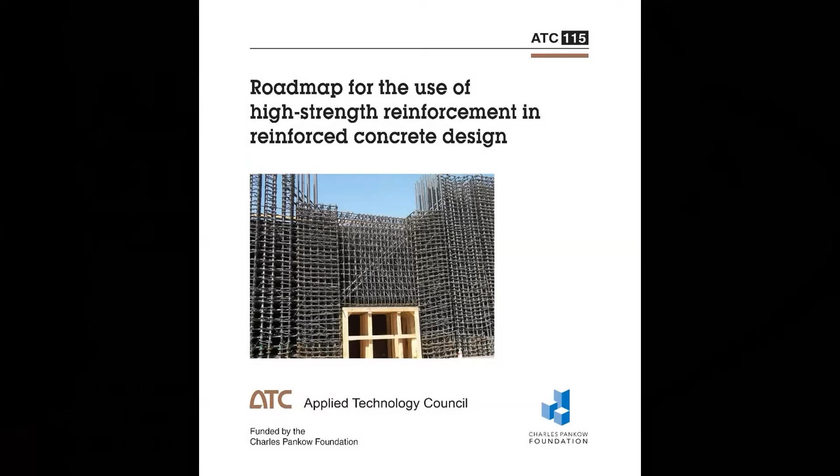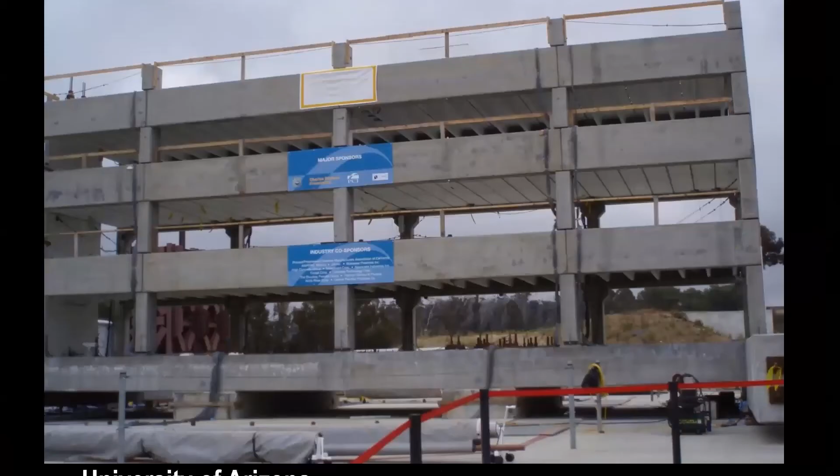Over the last 10 years or so, there's been a pretty substantial increase in the amount of new information and new research done on a wide variety of topics, whether it be high strength reinforcing steel, the performance of columns, or the performance of beams. Precast structures have been investigated substantially for seismic performance. Coupling beams and different ways to detail, design, and construct them have been tested, and substantial bodies of new research have been developed.

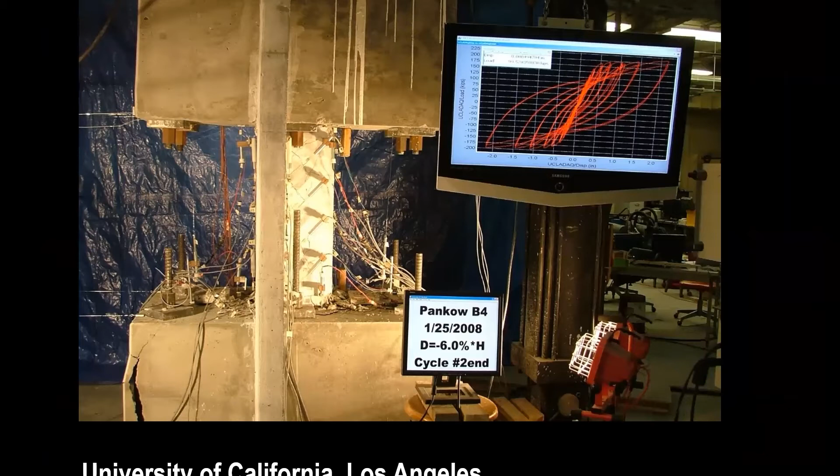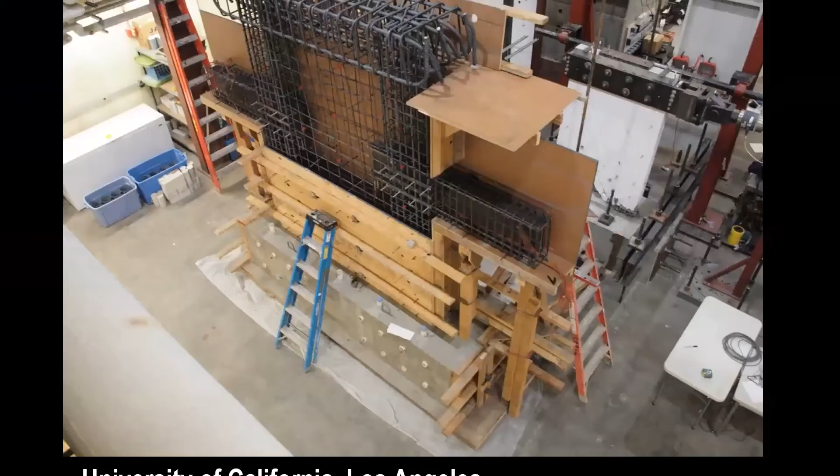Very shallow precast floor systems have been developed. Also, precast connectivity for cladding of high-rise buildings has been studied for its seismic performance. Shear walls with composite construction, whether it be embedded steel shapes in a wall panel or steel sandwich panel construction, all of these things have been researched.

And beyond research, guidelines like BIM execution guidelines to better the industry's practices of BIM, the TBI guidelines mentioned earlier, and more recently, studies of embedded or embodied carbon in the construction industry and in buildings through life cycle assessments - all of these topics have been advanced in just the last few years. And they all came from a point of view of really being inspired by practitioners and contractors, people out in the world facing challenges each and every day.

And it resulted in advancement in our industry through partnerships with various research industries. Now, all of that was done in a very practical way. There wasn't any silver bullet that inspired the thinking, and it didn't come from anybody's mobile phone. There was no app developed to come up with these ideas.

So in the ASCE 7 code, this is actually ASCE 7-10, there's a table that presents the response modification factors, or R factors, for seismic design. You can see right here for a special reinforced concrete shear wall, R equals 6, and the height limit is 160 feet, or about 50 meters.

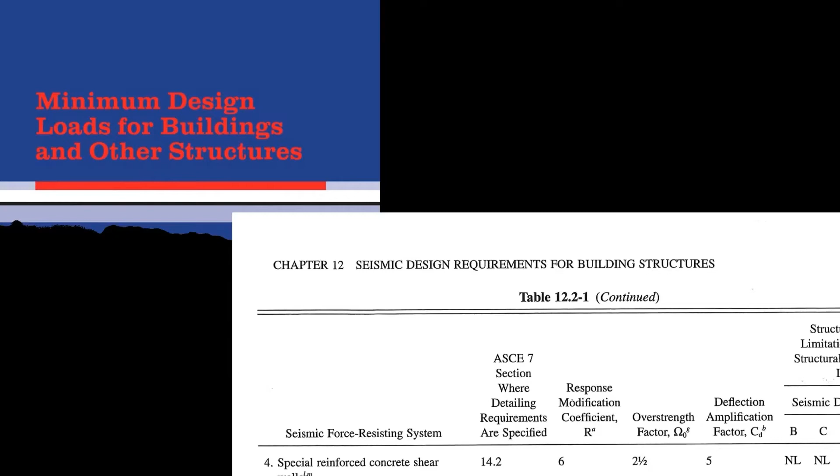When I first discovered this provision years ago, maybe 25 or 30 years ago, when I first started practicing, it always struck me as odd. Why 160 feet? It's a very curious number. Why not 150 or why not 200? Why is it 160? It seems very precise. I did a lot of research into why shear walls were limited to 160 feet, fueled by this question: why is it that in the first place?

What I discovered was a very curious situation. It dates back to 1920s Los Angeles. There was great concern by the city council about what they called the Manhattanization of Los Angeles. Specifically, they were worried about shadows being cast on the streets of otherwise sunny Los Angeles, and they wanted to limit the height of buildings so these shadows weren't so prevalent. So they passed a law in the 1920s limiting the height of buildings to 150 feet. Keep that in mind—that was the law to prevent shadows from being too great.

A couple of decades went by, and seismic engineering started being developed in the 1940s and 1950s. One of the things discovered or worked on by seismic engineers at the time was the importance of tall buildings. This was the type of building being built at that time: steel frame construction for taller buildings with brick infill panels or shear walls.

They viewed this type of construction as appropriate for tall buildings, but wanted to limit it to a certain height, and they didn't quite know what height to choose. So they took as reference the 150 feet that was the law in Los Angeles from the shadow study. It turns out that about the same time the structural engineers adopted the 150 feet height limit, the city of Los Angeles removed that height limit for zoning purposes.

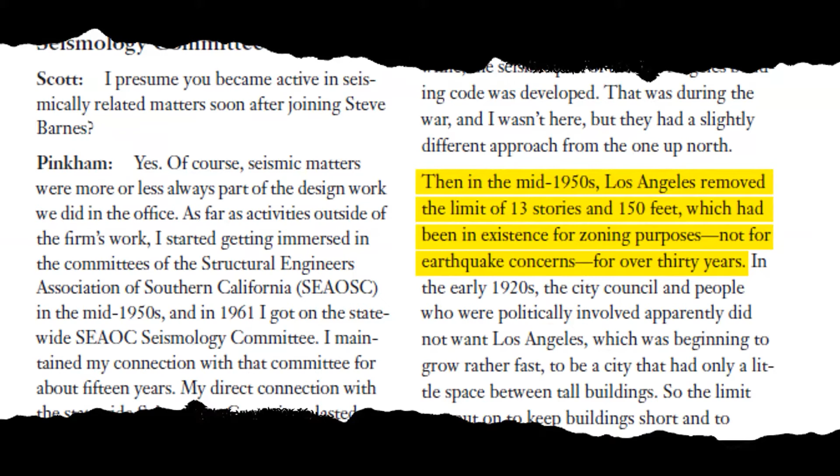I dug further into this to understand why did they change. And it turns out that this, in fact, was a typographical error. It wasn't intentional, when the code went to the printer, they made a mistake. It was intended to be 150 feet, but instead they printed 160 feet.

Well, that's very strange. So the printer was mortified of their mistake and asked the code committee, what should we do? We've already printed the codes up and distributed the code books. What should we do? And the committee's response was, don't worry, don't do anything. We don't really know the answer that well anyways.

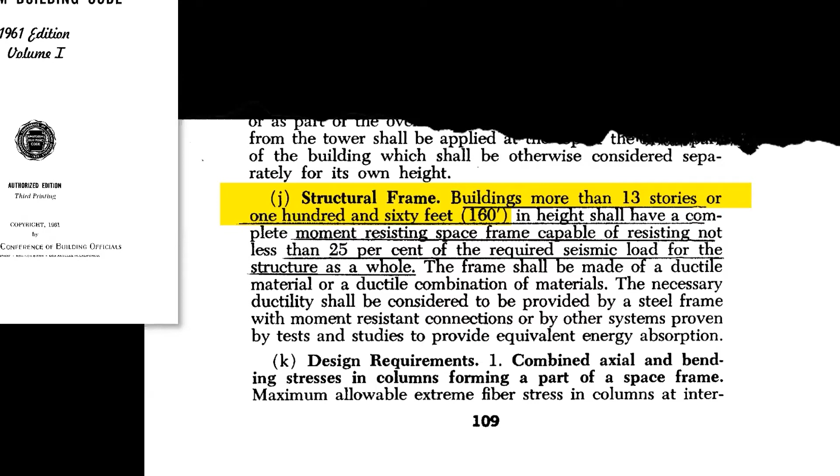Once you understand and appreciate that story, it gives you some basis to ask, well, why should I even follow that then? Because it makes no sense. And the truth is, our building codes are littered with this kind of folklore in terms of code provisions. A lot of it is not based on science. A lot of it is based on committee negotiation, committee compromise. So the point of this is to always ask why things are in the building code.

So today, when we're building these very ambitious buildings, like here in San Francisco, following prescriptive code language that really has its roots from the 1920s and then on to the 1950s doesn't really make so much sense anymore. So asking why is very, very appropriate.

That's why we created the TBI guidelines, to give practicing engineers more capability to use their skills in math and in science and in physics to really do proper engineering rather than following the prescriptive language of the code, because some of the things in the code are just nonsensical.

Turns out that we're pretty good as engineers at putting up hurdles. And these hurdles are things that we face, and then we feel like we need to jump over each hurdle, and then the next hurdle, and then the next hurdle. When in fact the objective is to win the race. So why not just run in the lane that has no hurdles?

This is the idea of performance-based design. Rather than following all of the hurdles of the prescriptive rules of the building code, why not go back to first principles, engineering, physics, science, and math, and run in a lane to the goal line, to the finish line, where there's no hurdles in our way.

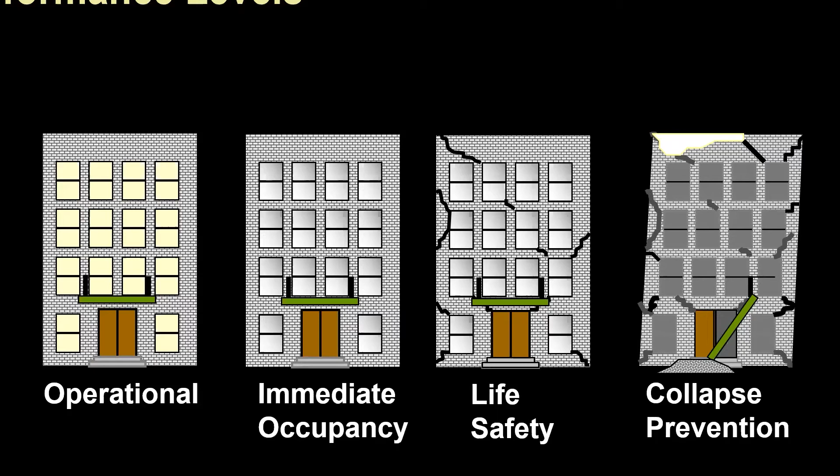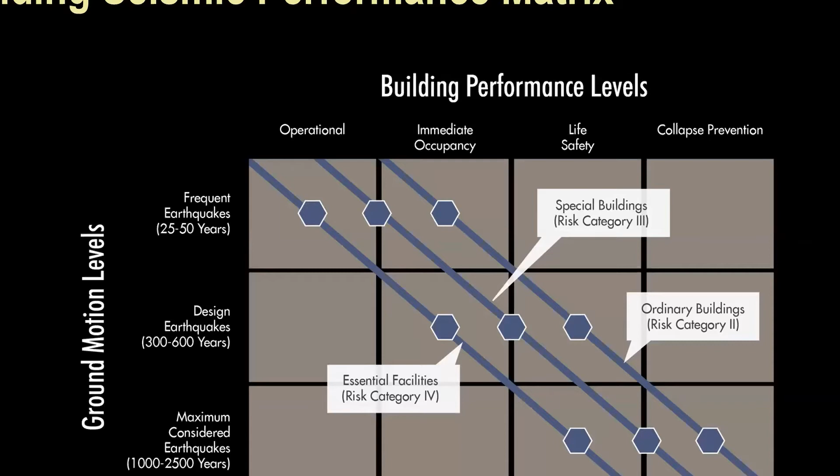Those of you familiar with seismic engineering know that we've worked toward targeting different performance levels, from operational all the way through to collapse prevention. And we've created a framework for performance levels as it relates to demand levels, to tune our designs to achieve certain objectives under various demand levels. For seismic engineering, this has become the norm, the standard, and it's quite robust. It really forms the basis of what we do today in the seismic design of tall buildings.

But for wind design today, we're still in the dark ages. We're not working in a performance-based environment at all. We're still working in a prescriptive code environment where we define one design wind speed, and then we design our buildings to remain elastic under that wind speed.

For places like Miami in this photograph where hurricanes are prevalent, or in other places like where my good friend Boise lives in Manila, where typhoons are present all the time, our buildings are very, very, very conservatively designed because they're designed to remain elastic under this peak wind demand, this peak wind velocity. Why are we doing that?

Why don't we instead adopt a philosophy similar to the seismic design philosophy, where we allow different performance levels and some modest amount of nonlinear behavior in our buildings, and in doing so, make them much more efficient and much more cost-effective for our clients?

Anyway, this is a question that we've asked recently. We've asked why. And we're working very diligently with many collaborators around the world to advance the idea of performance-based wind design, so you'll be seeing more about that in the coming years. But it all started with this question of why are we still doing it essentially the same way that's been done for the last 70 years?

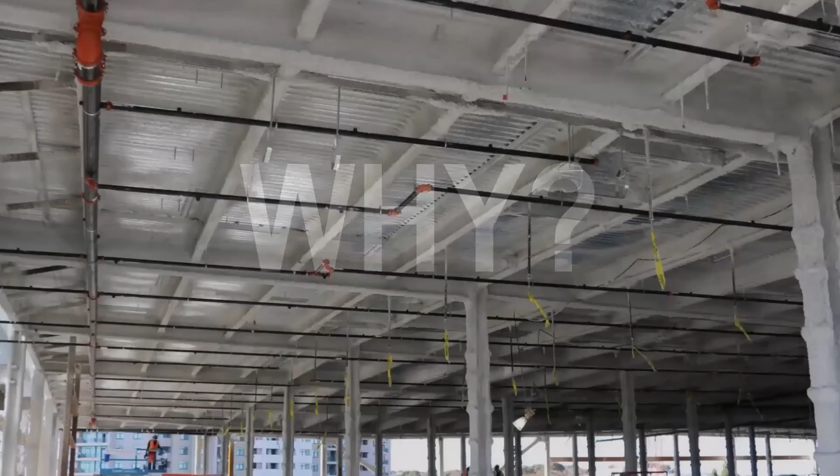Another area where we're asking the question why is in steel construction as it relates to fire protection. Here you see a standard construction type where the steel beams and steel columns all have a spray applied fire protection, and in addition, you see the sprinkler system. And once again, the question is, why is it that way?

And the truthful answer is born mostly in folklore. There's not a lot of science behind why are we constructing and fire protecting steel buildings that way. So instead today we're advancing the idea of performance-based structural fire engineering to, again, use science and math and physics to understand temperature as just another load case for steel construction.

That was the question. And the question was, why not locate the post-tensioning anchor, here you see here, outside of the core wall rather than inside of the core wall? By moving it outside of the core wall, it would offer great efficiencies in construction and reduce a lot of complexity. And so we asked, well, why not?

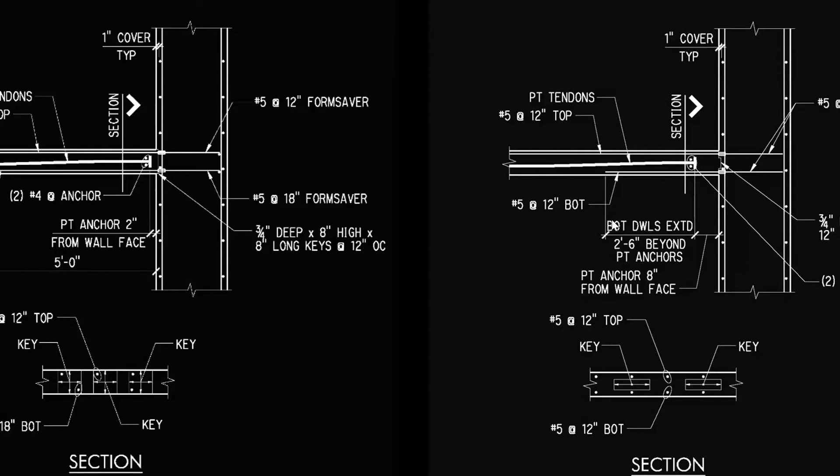And why not look at it a couple of different ways? On the left-hand side, you can see the anchors close to the wall. On the right-hand side, maybe moving the anchor a bit further away from the wall. Why can't these details not work? So we asked the question, why not?

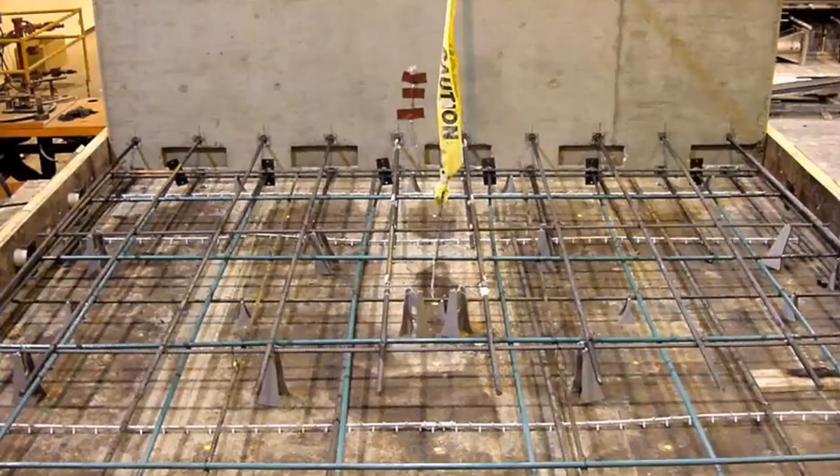And we went into the lab, and we actually built a full-scale test module of a core wall and a slab and a column. And we reinforced it. And then we put it through the rigors of testing to prove out that this detailing approach actually had merit.

The results of the testing showed that it performed quite well. And we ended up publishing the report, or the test results, in a journal and sharing it with the rest of the industry.

And from that experience, we learned two things. One is we learned about the performance of the connection. Well, that was important. But what was more important that we learned is by sharing this information with the rest of the industry, we actually impacted many, many buildings beyond which the few we were designing. And in fact, the state of practice, at least in the US, changed almost overnight based on sharing that information.

But it was all born in this question of asking, well, why not? Why not do it differently?

So today in the US and in many places around the world, one of the construction types that's being investigated and built is heavy timber construction. There's a lot of interest in heavy timber construction because of its sustainability, the reduction of embodied carbon. It's become quite popular in many places around the world.

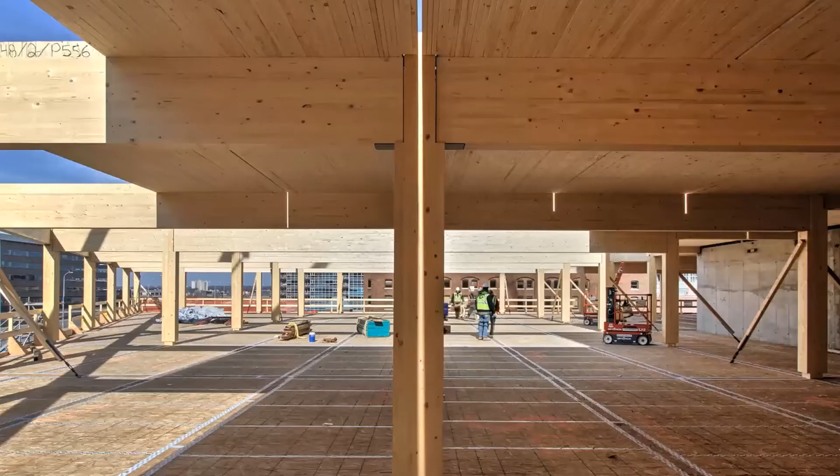So again, asking the question, why not, in this type of construction, why not grow a tree that's actually genetically engineered so that the properties of the tree better support the engineering needs of this type of construction? Because today, that's not what's done.

Today, what's done is the forest industry goes out into the forest and cuts down the trees, sends them to the mill, grades the trees, and takes only the most select lumber to make these buildings. There's a great amount of waste in doing that. So why not do it differently? Why not grow a proper tree to build buildings with?

Why not genetically engineer a tree that has better properties, better strength, better modulus of elasticity? It's no different than many of the food crops already grown to feed the populations. Many of our food products have had some amount of genetic engineering done to the corn or the wheat or any other food product you can imagine. Why not trees?

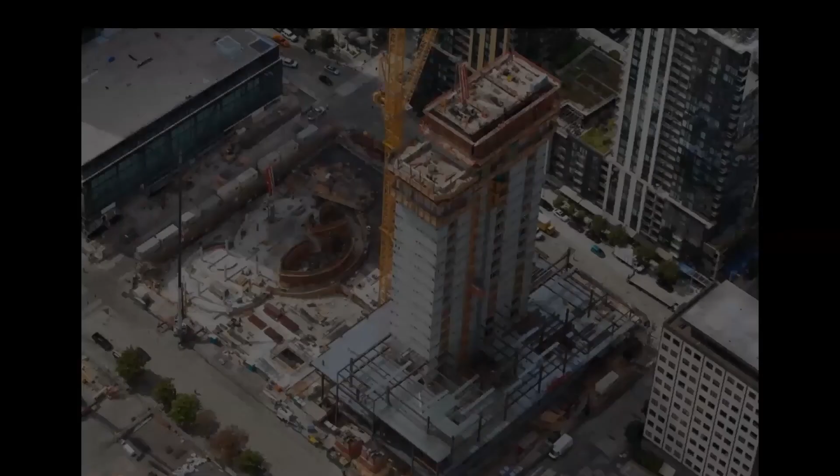Another thing that's come up in the last few years is we've built a lot of buildings across the world where we've used a reinforced concrete core surrounded by steel framing, with the steel framing trailing well behind where the formwork is for the core. This system has been very economical, very efficient, but what you notice is that the concrete construction is well ahead of the steel.

This is because the concrete progresses at a slower rate than the steel erection. So they must start the concrete much, much earlier, such that the steel won't catch the formwork and the casting of the concrete. That process drives the schedule for the construction of these types of buildings.

So the question we asked was, why not do that differently? Why not build the core wall somehow differently? So we went into the laboratory at Purdue University and built some very large test specimens of composite wall panels using steel plates on the outside, filling it with concrete on the inside.

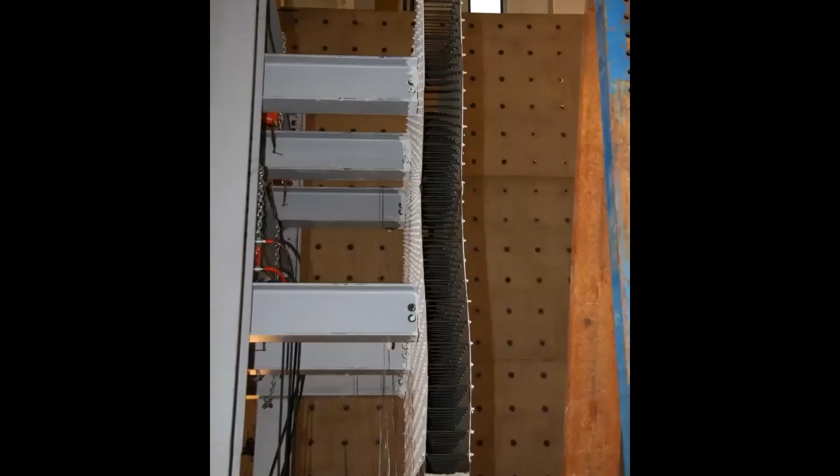With some of our professor friends, we tested it in all sorts of different loading situations, researching the connectivity of those steel plate panels to the concrete inside, and ultimately came up with a new system now called SpeedCore in the US. But it all started with this question of why not? Why not do it differently? Why must we always do it the same as we've been doing for the last 20 or 30 years?

So let me move now to the third idea. The first idea was to ask why — why is something the way it is? With the basis of understanding why something is the way it is, you then have the basis to challenge it and ask why not? Why not do it differently? The third idea that I want to share with you of the three is what I'll share next.

And it talks about collaboration. First off, imagine, if you will, that you have an idea — an idea that you want to share with the world, and you think maybe it will make things better.

But oftentimes, as is the case for many of us, me included, we tend to run into a brick wall. We can't get our ideas to move forward. No one will listen. There's no money to be had to support our ideas. And so we get frustrated and end up returning to the way it always was, and nothing has really been advanced.